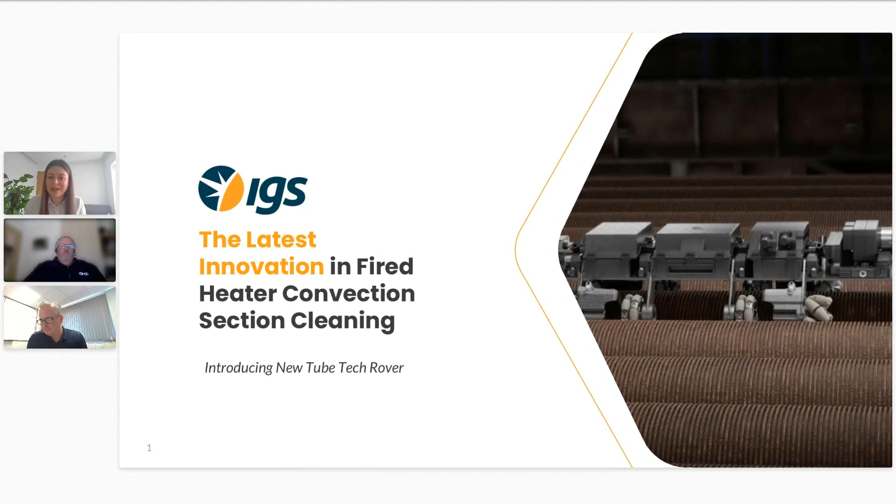So in the next half an hour, we'll be talking about the new Rover that IGS Tube Tech used to clean the convection section and deliver significant benefits to chemical, petrochemical plants and refineries in terms of fuel savings, emission reduction, or production increase. So Adam has designed Rover, and Scott knows the commercial application. And together they will be able to talk us through the main features and benefits of this new system.

Let's begin. So can we first briefly talk about what is the problem that we are trying to solve? Well, basically, and in very simple terms, what we're trying to do is to remove the fouling from the convection box tubes and the fins that are on those tubes. So to actually get the access into the area where these deposits sit on the tubes and the fins, because by removing them, we will bring back the stack temperature to where it should be, because you will absorb the heat that is now being lost.

We will bring back the performance, and when we say performance, it means the heat transfer performance from the waste heat, which is the flue gases, into your process side or your steam or whatever it is that you're trying to heat, and we will reduce the throwaway gases so that your production, your output remains where it should be, rather than being taken away and reduced.

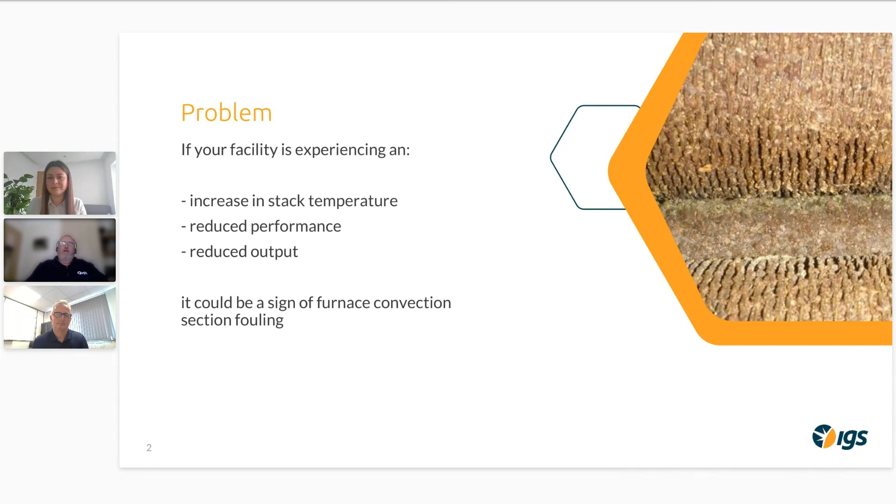All these problems indicate convection box tube fouling, and the deposits that build up. And these deposits come from strange sort of areas. It can be in your fuel, even though you think you're in the specification range for your fuel, it could still have some kind of dirt in the fuel. So that deposit will land on your tubes. Even your burners may, for instance, not be in proper balance. May have a wrong mixture, wrong air coming in from outside. Environmentally, obviously, air carries a lot of debris with it as well, depending upon where you are. So again, this all adds to fouling onto these tubes.

So can we have another slide? Here we go. You see another slide.

So how do we solve the problem, Scott? So what do we do? We've designed an ROV. Adam's with us today, who has been a key feature in the latest design of ROV. We have basically evolved from the original ROV, which was a very small unit and very compact, but it lacked the ability to do everything that we now need to do.

Now we know the marketplace and how big the marketplace actually is. So the original Mark 1, shall we say, has risen up through the Mark 6, and to the latest one, which we're now showing you today, which is a Mark 7. They've all had this little transition as they've matured, and we've overcome other little challenges as we've developed the unit, so that it can now do many different things rather than just one type of convection box. What we're looking at is restoring.

Sorry, Marina, I didn't realize we were having questions in there to start with. Carry on. No, that's right.

I just thought, and what does that mean for the plant operator or the process engineer? After the convection section is clean, what sort of benefit can they expect? Well, you can get everything from a small benefit. From a maintenance point of view, it's good housekeeping to start with. It's just like maintaining your car in reality.

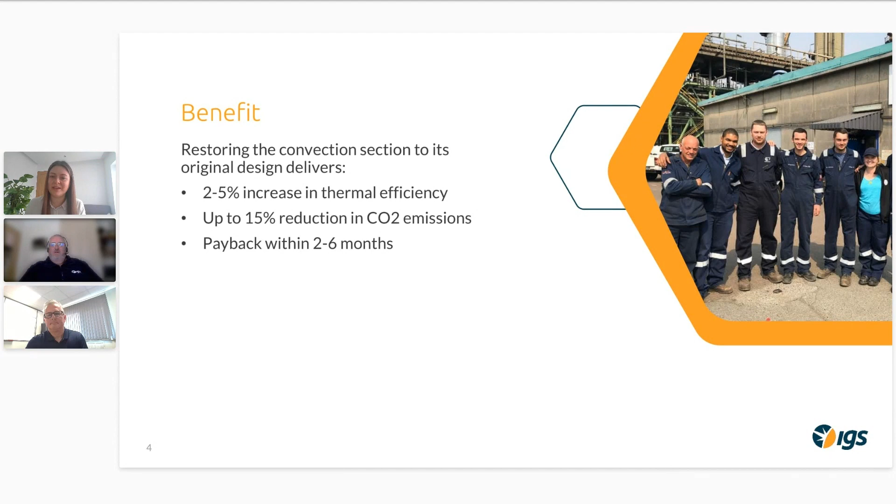Excellent. And I popped a case study as a handout where we carried out a project for Borealis, so you can see the kind of benefits that you could expect. So let's talk about the latest innovation. So that's the Mark 7 rover.

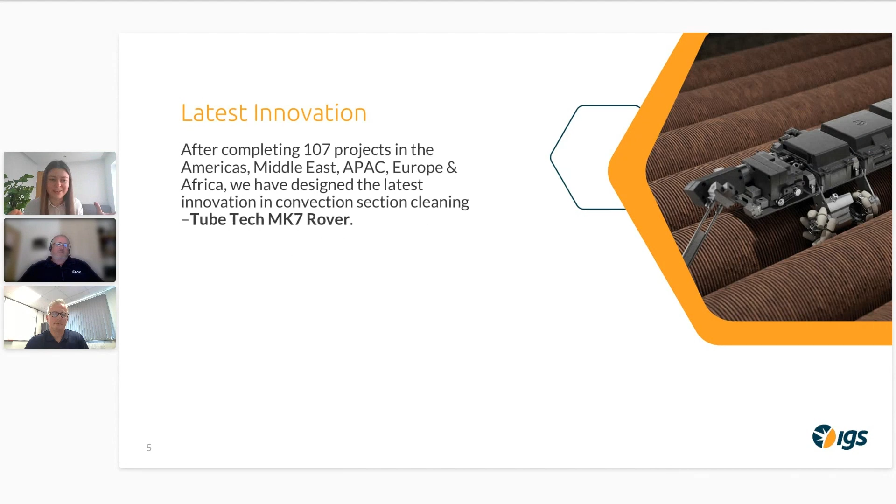So TubeTech have completed over 100 projects, which culminated in this new design. So let's go through some key features and benefits, and maybe Adam can kickstart this part. Yeah, sure. The Mark 7, it drives with mecanum wheels. I think most people probably know what mecanum wheels are these days. If you had a rover with 4 wheels on it and they were mecanum, you could essentially drive in sort of any direction you want.

For us, it's a bit harder because we're driving on coiled tubes inside a convection section. So basically, we drive the wheels in between the tubes, up and down, cleaning the row. And then not only do we go up and down, obviously we can climb across now. This is a new benefit of this new rover. So it climbs across, traverses across to the next row, and basically continues to do that until it's gone deep into the furnace.

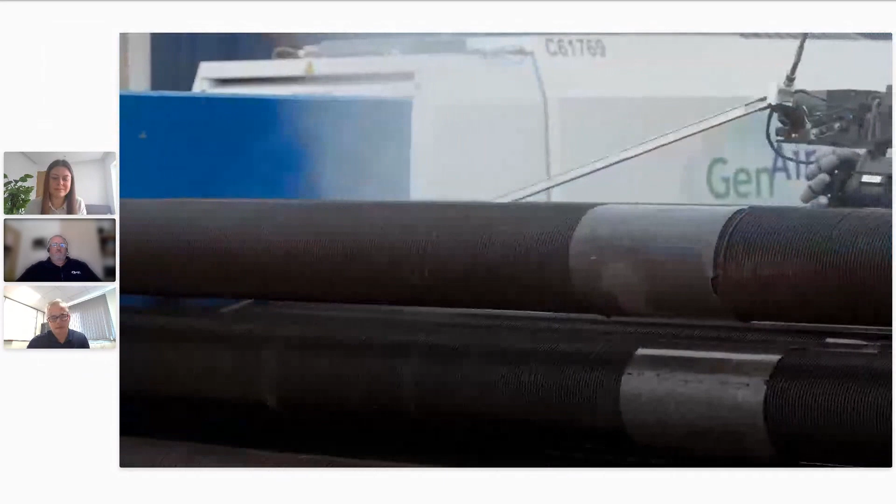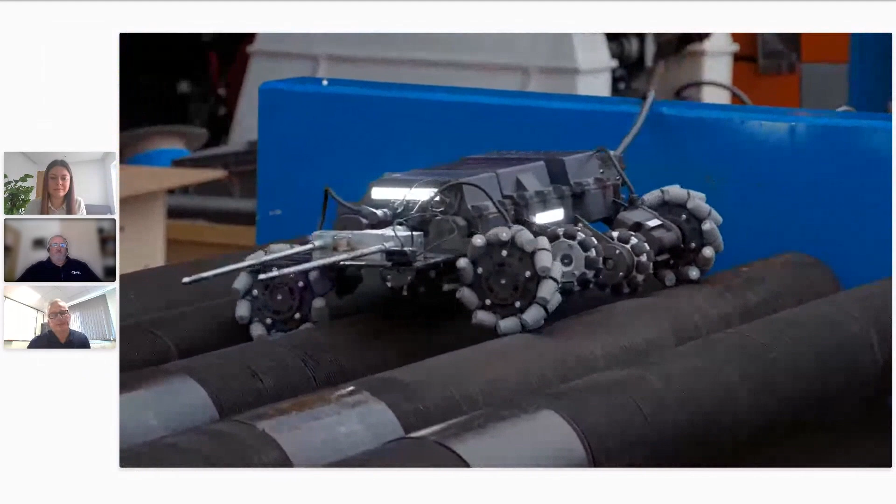Here we go. This shows it. So that's traversed across. And it does a little dance to get itself into position, and then it's ready to clean the next row. So it just means we can actually climb quite deep into a furnace and clean the whole convection section, and then we climb back to the access hatch, and then we extract the rover. But if you think of a crab, you just saw it there. It's like a crab shuffling over.

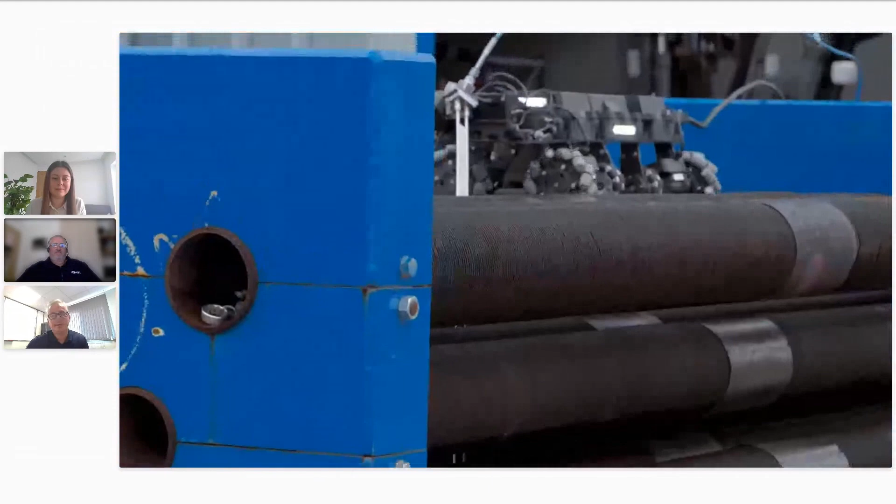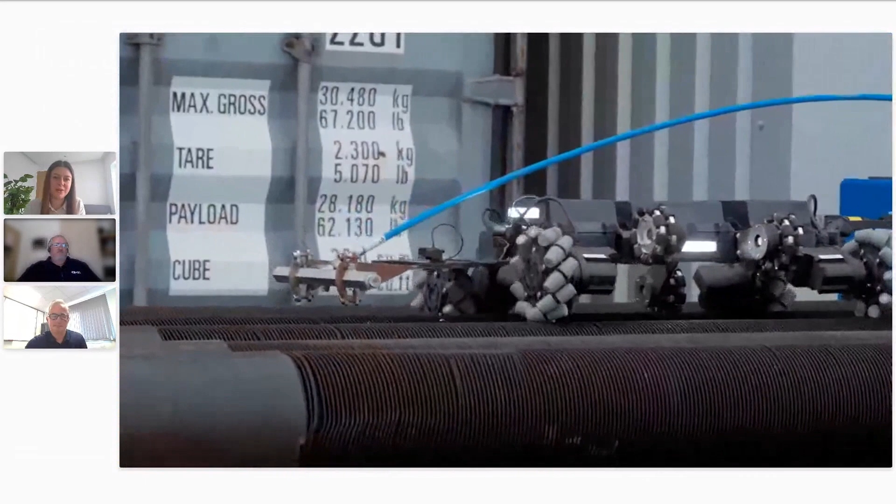We drive the mecanums all in one direction, and then we lift the levers in sequence, and that gets us over to the next row. So it's a big change from previous rovers that have had to be moved manually into the furnace. So yeah, I think the video shows it perfectly. Thank you. And Scott, what does that mean from the no-man entry or the safety perspective? That the rover can move across the tubes.

Yeah, it makes our life a little bit easier in the operations area, because the unit is now able to, as Adam kindly put it, crab across from one tube to the next. We don't have to try and manually handle the unit across those tubes. We used to do this with, and I hate to call it the pizza tray. So we would drive the ROV onto a tray and then move the tray over.

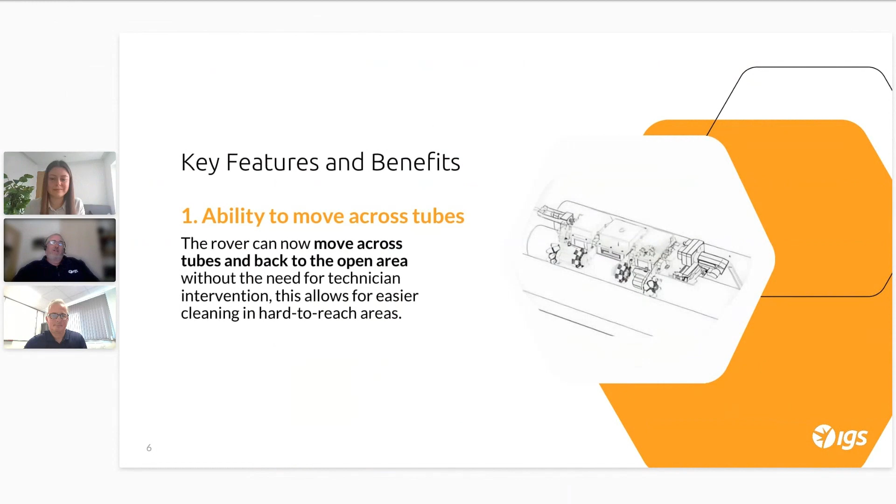This takes this away from where we were, because it would always mean you had to drive all the way back to the hole to be able to drive it onto the pizza tray, to move it over to the tubes to drive it back off again. If you've done a cleaning pass and you've cleaned everything to one end, then you can actually move across a set of tubes and drive backwards on a different set of tubes. Theoretically, that's going to make things a little bit easier and a little bit quicker. Yeah.

Thank you. Let's go to the next feature. So what does self-aligned movement mean, Adam? Yes. Basically, because we're driving between the tubes, we can align very nicely and just drive up and down and climb across, and everything's in line. So we don't have to worry about guiding the rover along. In previous designs, we'd have tracks, tank tracks, if you like, driving on top of the tubes. And in that case, you need to guide it. So we'd have a spigot at various lengths with rollers that would guide it along.

But you need to make all those different versions and all those different size rollers and spigots. We don't need to do that anymore, because we just rely on the actual tubes themselves. We've got a 2-wheel system, a 4-inch and 6-inch, and that pretty much covers almost every convection section that we possibly work in. There may be some unusual ones and we'll have to make adaptations, but yeah, the self-alignment is really just down to the way it drives between those tubes.

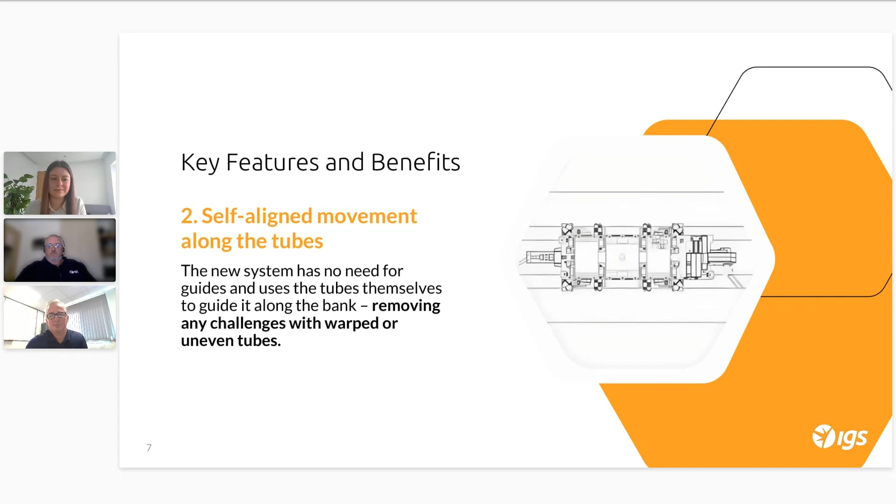Excellent. And the next feature: no setup required. I think this really relates to the fact that you basically just put the rover into the convection section, and you've either got 4-inch wheels or 6-inch wheels. You place it in between the tubes, and it aligns itself. There's an IMU sensor that aligns it on the tubes, and that's basically all it needs to do.

So your main choice is what size wheel for that particular furnace, but once it aligns itself, it's ready to go. And it will climb over because it uses an algorithm and software that we've developed in-house to climb across. So that's why there's no real setup; you don't need to know the pitch of the tubes or the diameter of them.

In theory, you don't need that anymore. You might have that information there anyway as part of the record, but in terms of what the rover needs to know, it doesn't actually need to know that. It just needs to sit between the tubes and then level itself, and you're ready to go.

I think that's what that relates to. Excellent. And it also automatically records and takes images? It does, yeah. It takes photographs and videos.

So you take some obviously before the clean and then some after, and maybe investigate if there's any issues in there, or refractory that you want to make a note of that's in the way and needs to be removed. But yeah, it'll record everything.

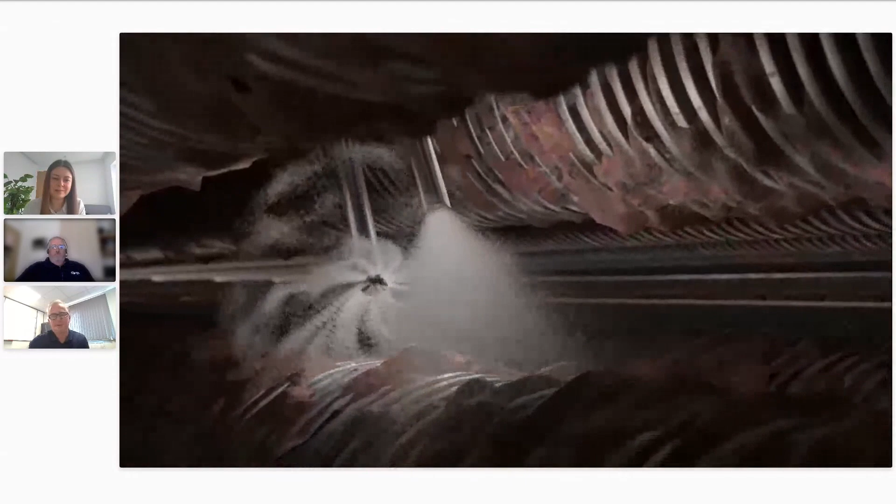Excellent. And flush and lance available on the same system, and I think we have a video clip of that as well. Yeah, it just means you can deploy one rover and it can flush the top bank first of all, and then you can remove the flush bar and fit the lance head, which just clips onto the front, and plug into the main unit, and then you can lance as well.

So you don't need to deploy one rover to a certain job separately, you could in theory deploy one rover to a job, and it can do all the flushing and all the lancing, with a quick release head. So it's just quicker and easier than having to set two rovers up. You can just use the same one for both jobs.

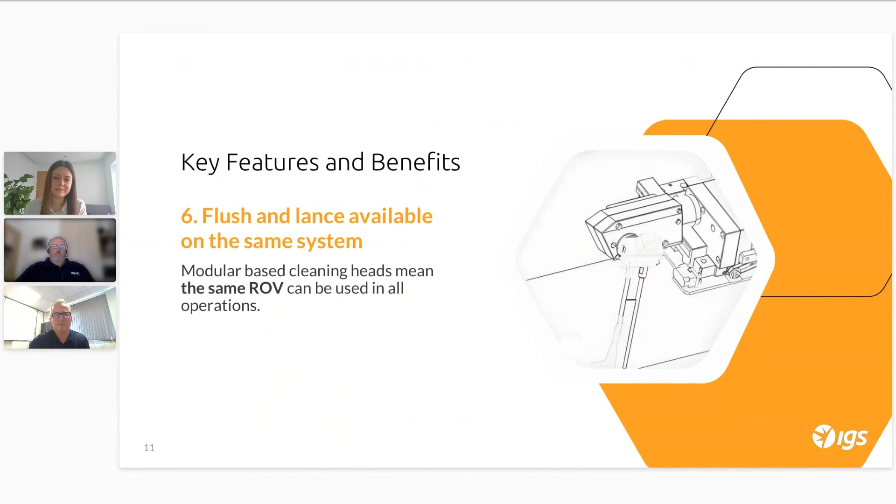Pretty much leave the rover inside the convection coil, and just reach your arm in and change over the head, rather than having to bring it out and do a mechanical change. True. Yeah, very true.

Yeah, I think this is just the power off and restart functionality. Yeah. How does that help? I think that just speaks for itself.

You need to know where you are. If you stop somewhere halfway through the clean, and the power goes, it has a memory feature to know what it's cleaned and where it is, so that you can start again once the power's gone back on.

So it might be that you removed it, and it could drive back to where it last was. It will know where it was. So it's just a power issue. If you're having power issues, you need to know where you've cleaned till, so you can carry on from that point. So we've got that feature on this rover.

And the LiDAR control distance sensing? Yeah, this is just positional information. As mentioned before, we've got LiDAR point lasers at the back and the front. So as long as there's a wall there, they'll give you distance information. And if there isn't, we rely on the wheel speed per second feedback from the wheels coupled with the LiDAR. So we can use either, or combine them, to have the most accurate positional information. That's what that relates to, really, the LiDARs.

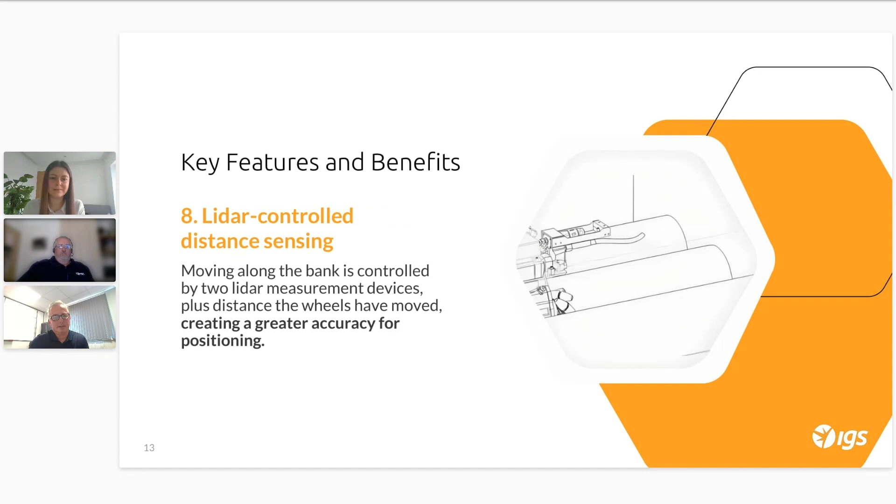Mm-hmm. This is worst case scenario, like an important part. So the super override.

Sometimes when you come across a heater, you'll find bits you've not been told about, and they become challenges on the job. This does happen. What we have here is basically an override. So if we come to a heater where the ROV is pre-programmed, it knows the length of the tubes, it knows how to measure everything, it knows how many tubes wide, etc. It can do all that by itself. But you come to a heater where something has changed dramatically, and all of a sudden you need to override what the unit's actually doing, and take over yourself. So we have an override to let the operators deal with the unit at that point.

I think it's probably a bit better, this system, in terms of if the pitch is wrong or the diameter of the tubes is incorrect. Luckily, this system can probably adapt to that quite easily. But certainly other things, there's always things that change. Just to be rest assured, we can change the settings on site when we're there, if we need to. Oh yeah, agree with what Scott said.

Excellent. And the support plate climbing function? Yeah, support plates are just part of the construction, really, of the bundle of coiled tubes. They need to be there mainly to hold it together. But at times they can come above the tubes, so if the rover comes along, it's just like a brick wall, it can't get through. But in our case, up to about 50 mil high, we can climb over it with this new rover.

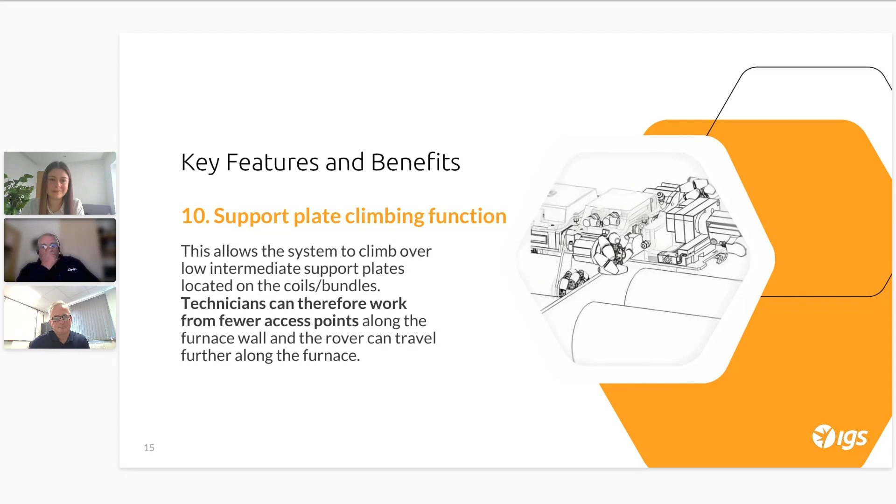Excellent. Well, now we've actually gone through all the features of the rover. There's quite a lot of questions in the chat, and we'll get to them in the next 2 minutes. Just a quick overview of IGS.

We discussed one of the solutions that we offer to energy and chemical plants. There's also a range of other solutions that IGS offers. Among them, HVTS for corrosion and erosion protection, which can be applied within process vessels, towers, columns, heat exchangers, and boilers. We covered TubeTech, which is one of the services IGS offers for fired heaters and furnaces that help reduce emissions, increase production, reduce fuel consumption. Another service that complements the TubeTech offering is Cetek. So TubeTech works in the convection section, Cetek works in the radiant section. Together, the benefit can be quite significant.

In addition to that, there's a HotTech service, an emergency maintenance service that can be applied to live heaters during normal operation. For example, if you have a hotspot or any other bottleneck or maintenance issues, these can be resolved with zero impact to day-to-day operation. And finally, another niche offering, very specialist, very safe, is CUI protection that gets applied on the outside of equipment.